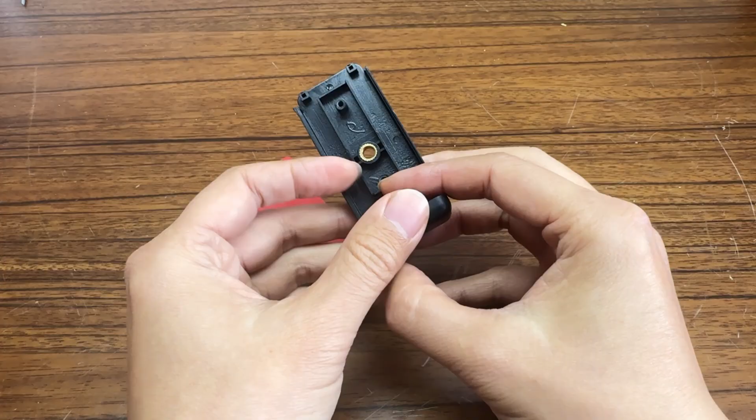My goal is to help AI understand everything from the overall shape to the details. I think the most important thing is to get the general shape right first. Once that's correct, the rest of the process will be much faster. Before describing the overall shape, maybe I can just send the different views to the AI and see how it understands the 3D structure.

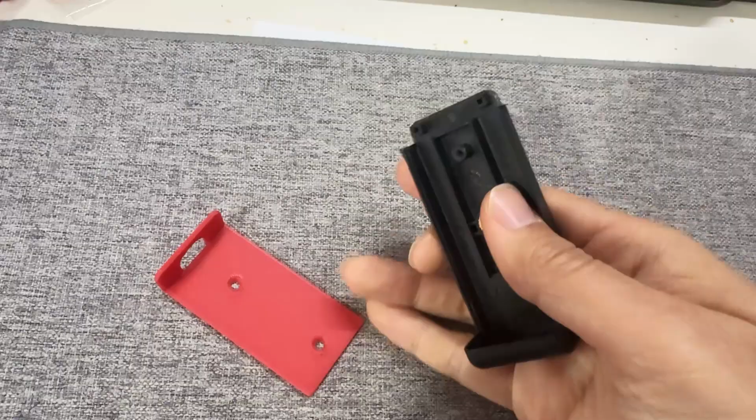In my opinion, it is also an L-shaped part, but not only a sheet. Maybe it is a solid L-shaped part. I'm not sure. Okay, so let me take the pictures. I think this view, the top view and the side view, will help AI understand the 3D structure the best.

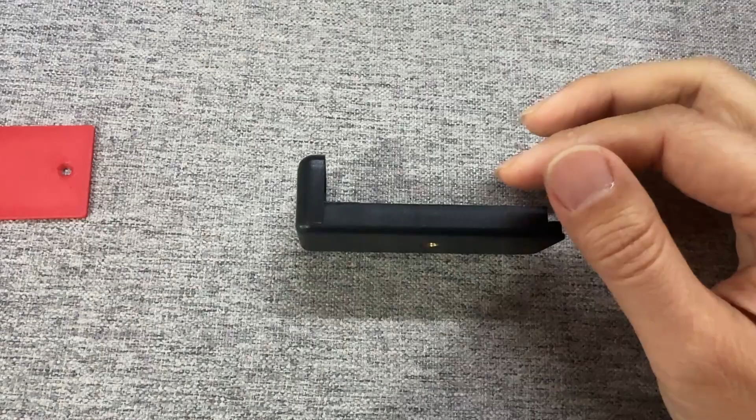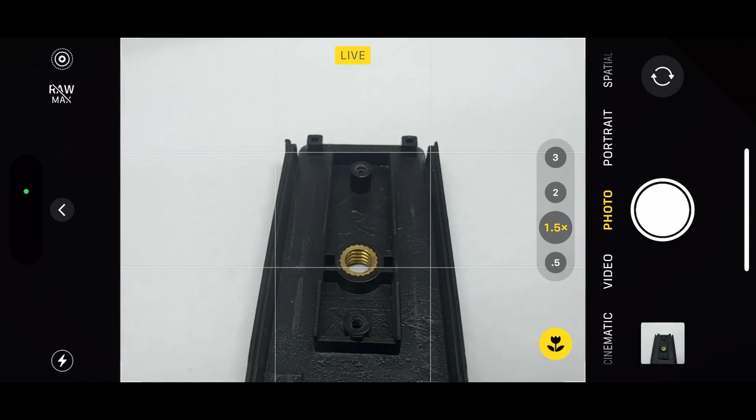Okay, I just sent these views to Claude and asked it to use the build123d library to help me model a broken part of my tripod smartphone mount. Here are some views about this part. You can try your best to write model code. The last image shows the broken spot. The overall shape of this part looks like a solid L shape.

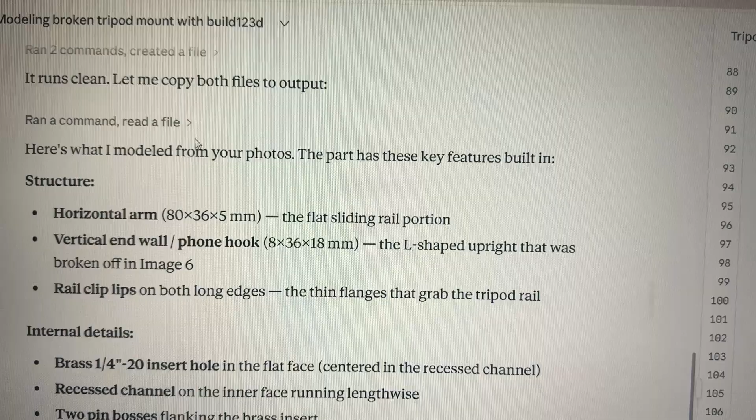Claude thinks for a while, and it's really good. It interpreted every image. The ridiculous thing is that it gives me the STL file. Oh my god! But I just expected the Python, so I copy the Python code to VS Code because there is an OCP CAD viewer.

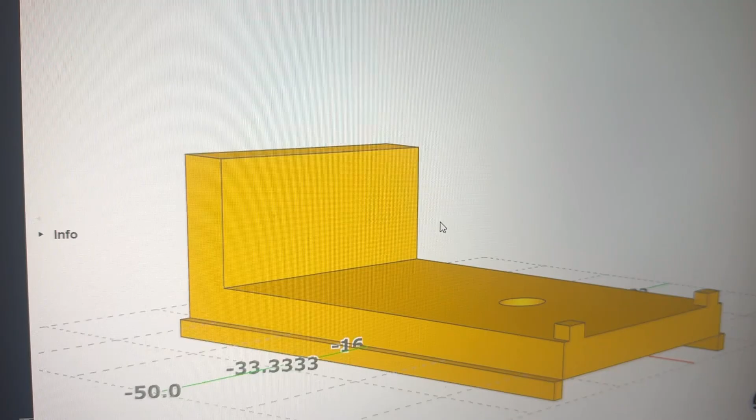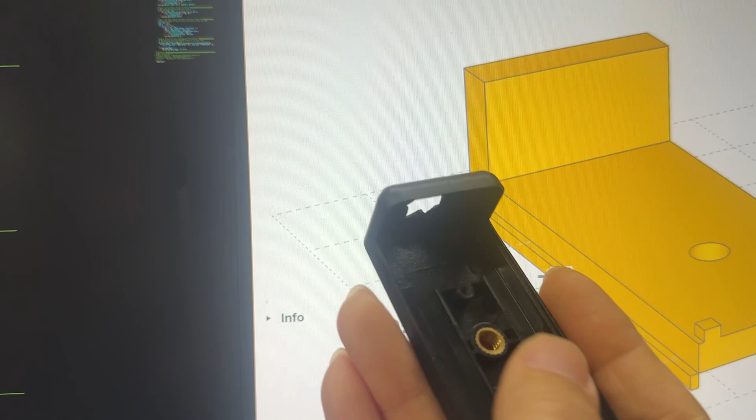Okay, let's go back to see the real piece. I think the overall shape is okay. It's really an L-shaped solid piece. And wow, these two blocks are already here. So I think it's great. There is also a through hole, but it's not the same as the actual part, but it doesn't matter. This is just the first turn.

Wow, it really has a rail, but the actual piece is smooth here. It doesn't have a rail. The rail is here. It's just lower than the outer edge. Next we need to ask AI to fix some extra and useless geometric features. Next thing we need to do is reduce these extra edges. Okay, let's do it.

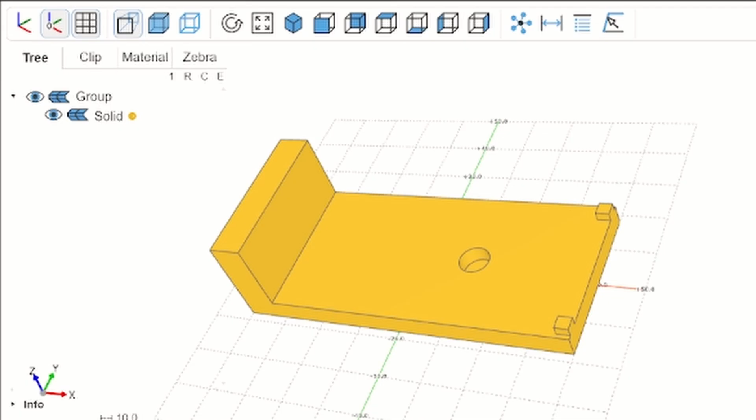It doesn't work. Yes, I failed on this experiment. It seems it is a big challenge for current large language models. I tried on Claude, and after adjusting the prompt again and again, it still can't give me a correct model. Even the overall shape, it can't get right.

So I found that maybe 3D modeling is still a big challenge for current large language models, and it really makes me think about how we humans do 3D modeling work in CAD software.

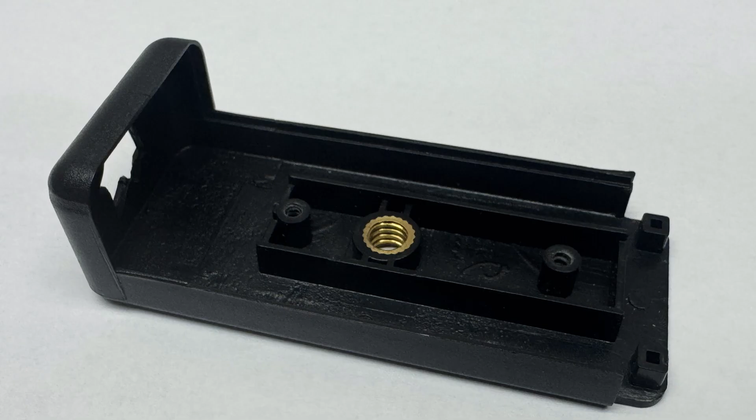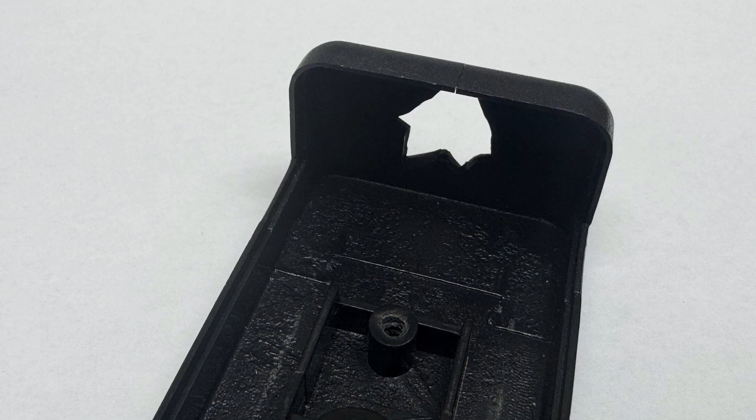I got stuck on a very small feature, in my opinion, this step. In this shell structure, there is a step on the inner side of the shell, but the lower step is across all this edge. The language model can't understand it right. The AI always said it understood confidently, but the result always has some errors.

If I modeled this part myself, it would take me less than 30 minutes. But I spent more than 2 hours with AI, and eventually it gave me a generally correct answer. So it really makes me think about how we do 3D modeling work in CAD software.

The large language model is just a language model, but we humans do modeling in CAD software through the user interface. We use the mouse and keyboard to operate the user interface. But actually, we need to understand the structure. It's not just about drawing a shape. For a human designer, we need to understand every geometric feature, and that's not the only thing we need to do.

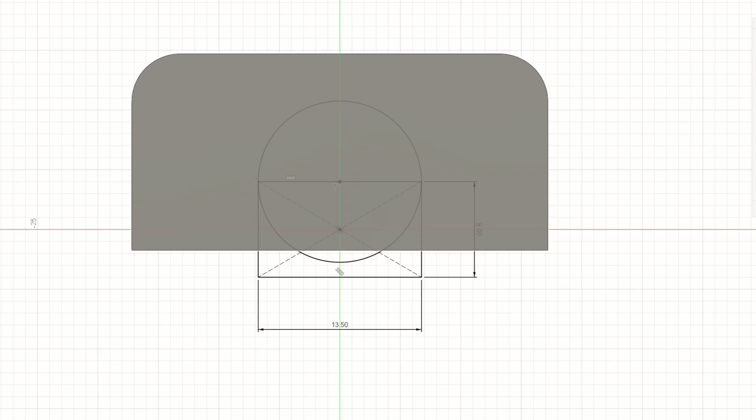So modeling a 3D structure is not just one step. It really looks like a common coding task. Maybe 2 years ago, most people didn't believe AI could handle a complicated coding task. But today, most people believe that. I think 3D modeling is just a chain of different kinds of operations. AI is proficient with the final process, coding, so maybe in less than 1 or 2 years, AI can handle 3D modeling.

I believe AI can handle this kind of task because the 3D modeling process still has a pattern, and everything that has patterns can be learned by a neural network. This conclusion is just from today's one-time experiment. Maybe there are limitations on my side. Maybe I don't know how to describe geometric features precisely in words, or maybe I just chose the wrong model.

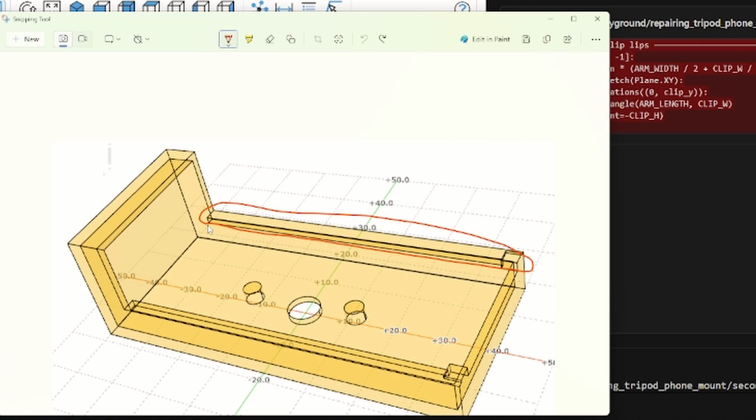I forgot to say that in this experiment I also tried to draw some lines on the snapshot to let AI understand what I pointed at, but it still doesn't work. But this is still a very valuable experiment and experience.